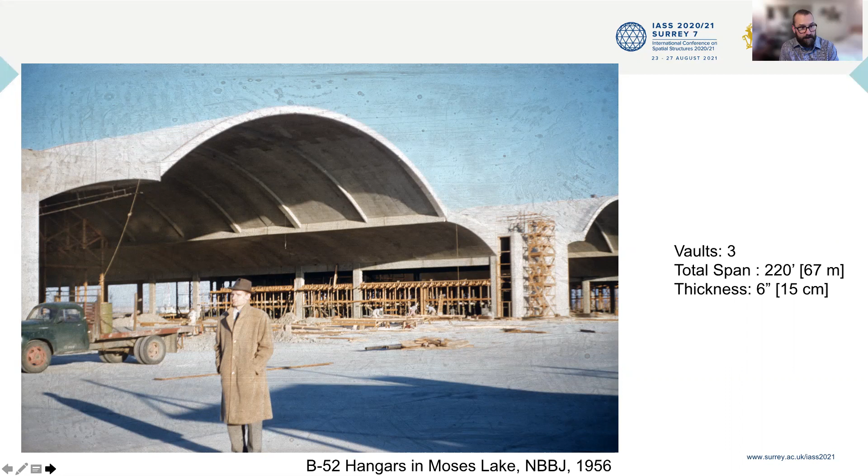Just a quick reminder about Jack Christiansen. He was a significant American designer of thin shell concrete structures. Christiansen found economy in easy to construct and reusable formwork systems. And this is what made thin shell concrete cost effective in the labor markets of the Pacific Northwest. He designed a variety of shell geometries, starting with a barrel vaulted form, including this long span airplane hangar for B-52 bombers and for the Boeing company.

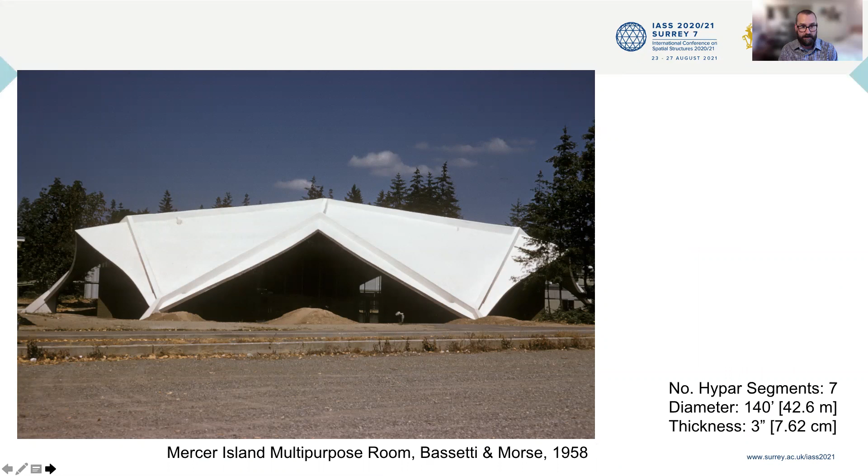He was inspired by the work of Felix Candela and adopted the hyperbolic paraboloid later in his career, arranging these warped panels to create domed-like shapes with stiffeners along the peaks, creating these valleys and these shadows. His career is, of course, capped by the design of the Seattle Kingdome, the largest freestanding concrete dome in the world. It was a large multi-purpose arena for the city of Seattle, bringing the Seahawks, the Seattle Mariners, the Seattle Sounders, and providing a public resource for over 20 years.

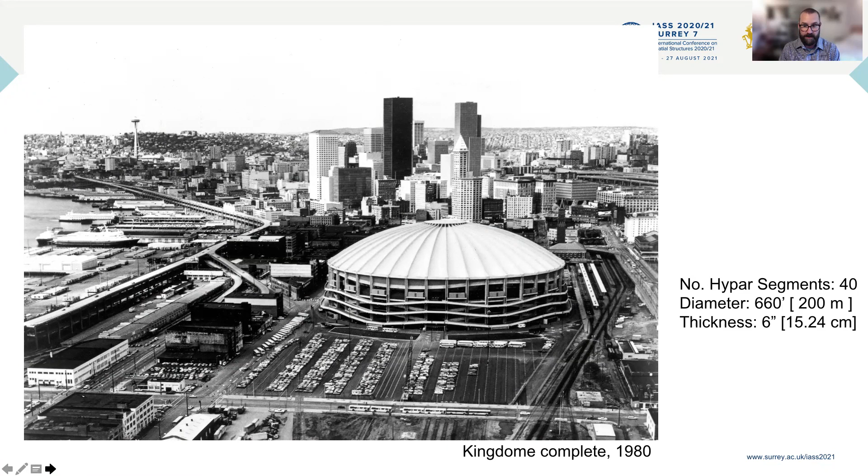Christiansen's career contained over 100 projects, primarily in the Pacific Northwest, but indeed existing in places all over the world, from New Orleans to Minnesota, including one project in Saudi Arabia. And you can see the variety of forms really do describe his creativity in structural design. Which leads us back to the Green Lake pool itself, a rather simple structure, and yet it is the starting point. So understanding Christiansen's longer career helps us see this project with new eyes.

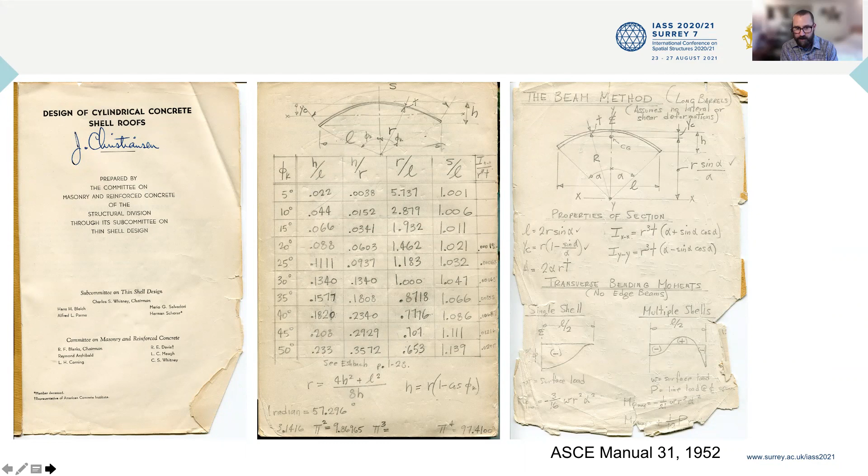Christiansen got his start by using the ASCE Manual 31, published in 1952. So this design guide provided a blueprint for how to design cylindrical shells. Christiansen was able to understand the guide and, as you can see here, came up with his own methods for using the information contained in it. He developed the drawings for the shell, and with a mind towards efficiency already, detailed the reinforcing for just 1/4 of the shell on the far left, of course, taking advantage of the biaxial symmetry, and you can see the geometry definition in the lower portion there.

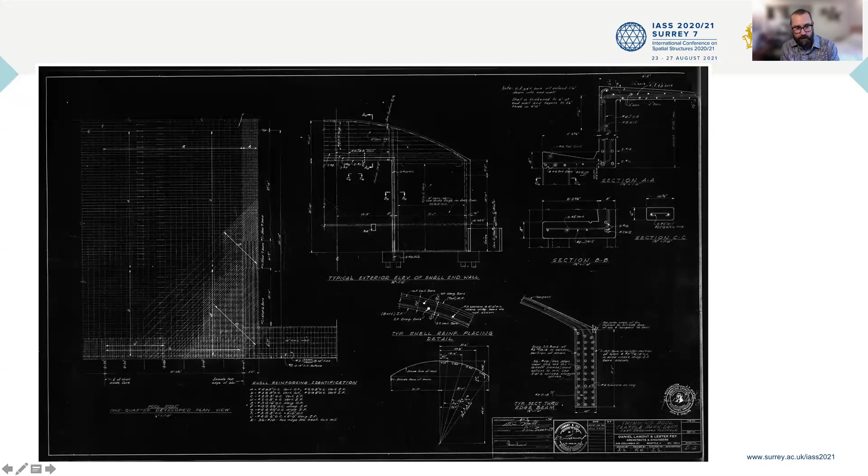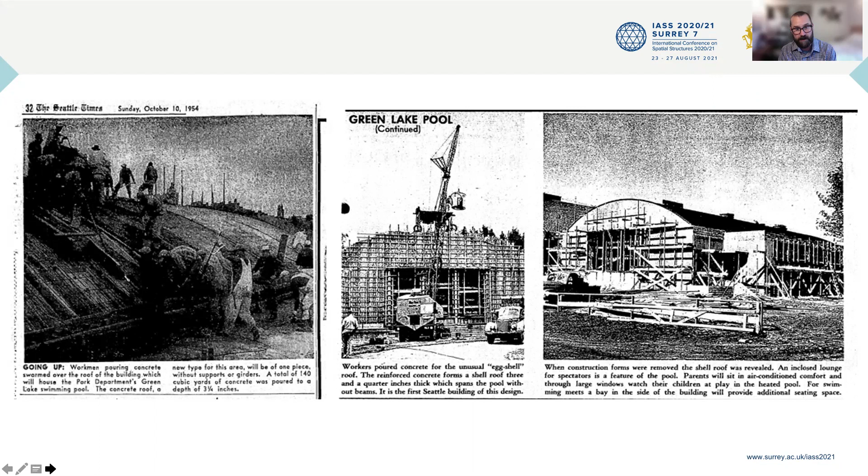The design guide did not describe how to build formwork or any sort of methods for economy in that. So this project is really where Christiansen started working closely with a contractor to come up with a precise wooden formwork system. And it is really where he learned the importance of reusing formwork for the economy of these shell projects. While this form was only used once and then discarded, in virtually every other project of Christiansen there was a reuse of formwork.

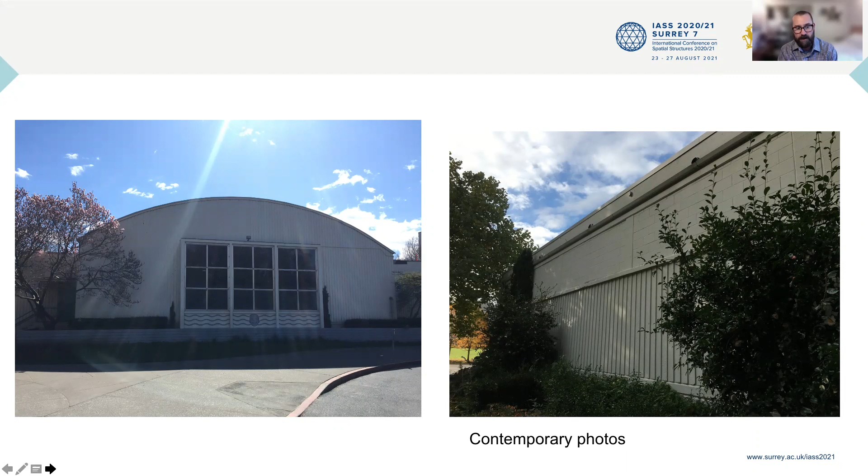So here's the project as it stands today in the middle of Green Lake Park in Seattle. The building is in good shape with a durable exterior. Understandable waterproofing and mechanical upgrades have occurred over time. And yet there is a new urge to improve the space. As with any building that's over 60 years old, Seattle Parks and Recreation has started looking into improving the assets of the park.

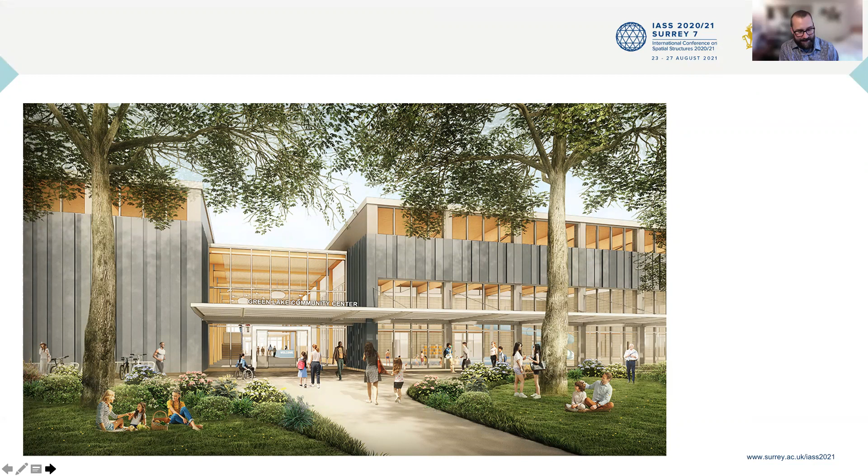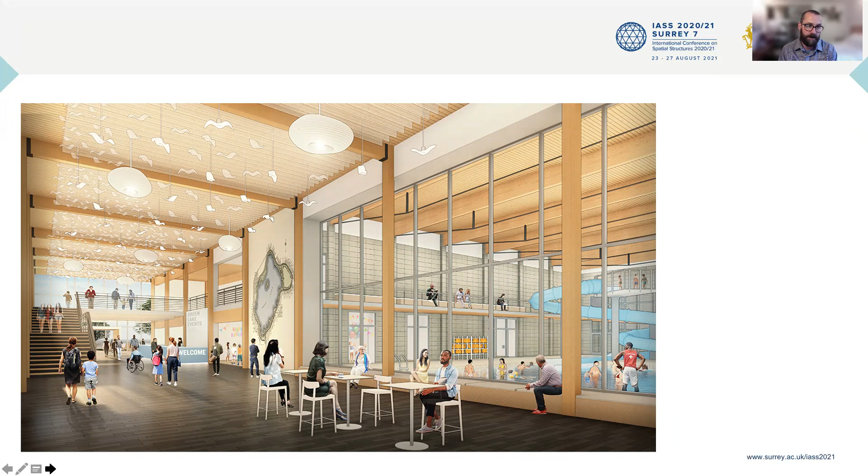They've hired a design team which assessed the current resources, and what they found through public outreach was that there was very little public appreciation for the structure of the pool. Some earlier designs called for the actual preservation of the barrel vaulted shell, but these were quickly abandoned. So the current designs are beautiful. They embody the current trends of sustainability with large open spaces, a wooden structure with all sorts of public amenities as a part of the improved pool structure.

Therefore, this project raises several questions. How can we as the IASS community better advocate for the preservation of these shell structures as hybrid works of architecture and engineering, when the value of a structure is not only visual or experiential, but in the experimentation or process of design? How can we describe the public benefit? This was Christiansen's first project. With more challenges coming, how can preservation be balanced with contemporary use? And I offer these as open questions surrounding the preservation of thin shell structures.